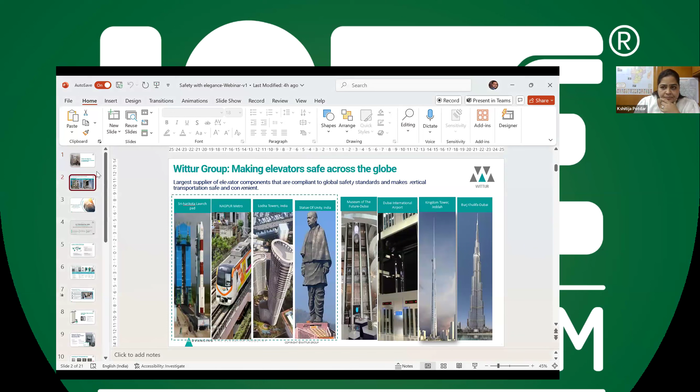We have picked up a topic with respect to safety with elegance, focusing on the glass doors, but we will come into the flow to help you understand why we have chosen this subject and where the relevance fundamentally comes in for Wittur, I am sure.

In the classic quintessential Bollywood style, naam to suna hoga. Wittur is something which has been in the industry for almost 1.5 decades now in India, and almost around 6 decades in terms of its operations overall.

We are the world's largest manufacturer of elevator components that are powering elevators across different applications, right from a residential segment to a very high critical infrastructure project, like the ISRO space launch center, the Sriharikota launch pad, metros, Sardar Vallabhbhai Patel Statue of Unity, world's tallest statue today, residential landmarks, or engineering marvels like the Burj Khalifa, Kingdom Tower of Jeddah, Dubai International Airport, and as much as you would typically think of.

Wittur products today are part of every third elevator in the world, and that's the kind of equity we have built over the years when it comes to our ability to serve you with the best solutions and products which make the elevator safe and productive.

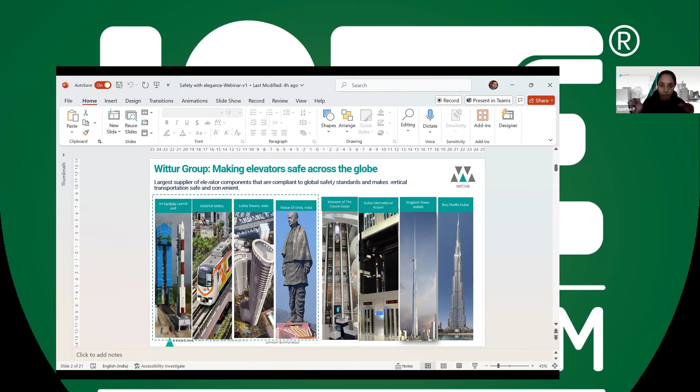So I was talking about the relevance of India in the elevator industry today and how it is one of the fastest growing infrastructure markets globally, with respect to real estate being pegged to be about 3 trillion US dollars by 2030. India is vertically growing up.

We can see it all around when we look beyond the metro cities, into our tier 2, tier 3 cities, and see how buildings are going taller. As such, elevators are also evolving, where to cater to a taller elevator, you have to focus on it being faster, much safer, compliant, and energy efficient.

These are some of the things which I'm sure is very topical, and each one of you who are part of this industry and joining me in this session would relate to.

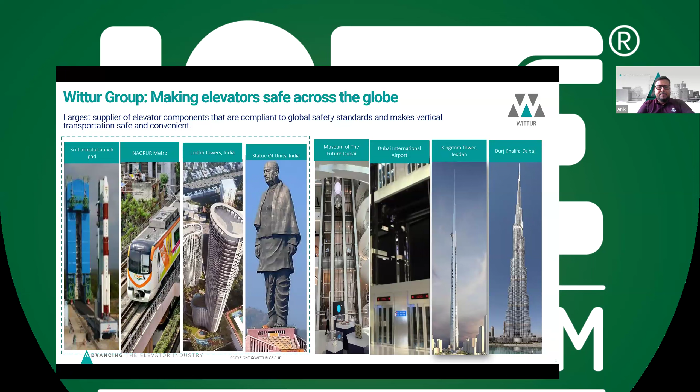That's why it's important for us to focus on what Wittur does today, to be aligned in that segment specifically. What we fundamentally believe is that what the elevator industry today is talking about as needs for the future, Wittur delivers today. One of the most topical aspects coming in is basically IS 17900.

All of you are familiar with the fact that on 21st of December 2025, IS 17900 is coming into effect, and the older IS 14665 is going defunct, resulting in a lot of new stricter norms becoming applicable specifically with respect to elevators.

There are multiple components across the elevators, like the doors, the door locks, the safety components, the control with respect to avoiding unintended motion, etc. Multiple aspects have been brought in, making the elevator expectations much more stringent in terms of compliance and performance.

Why I put this claim out in terms of what Wittur has been doing over the years is that what the industry needs tomorrow, Wittur does today in terms of what we bring to your solutions.

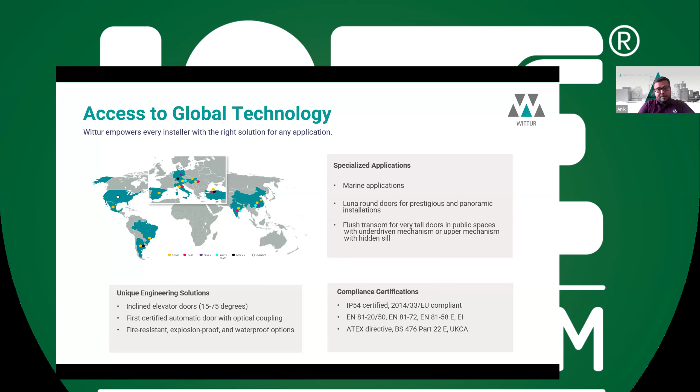Now that is particularly what makes Wittur a very strong partner for our customers, enabling them to solve the requirements of their end customers as per design, as per architectural requirement, and as per compliance and safety norms.

Moving forward, the India portfolio, I'm sure you guys are familiar with. In India, we manufacture the doors, both landing and car doors. We manufacture cabins, slings and car frames, which are compliant to 17900. We have progressive safety, we have overspeed governor, and of course we manufacture a full home elevator traction offering in India, which is very unique for the fact that we are offering a solution compliant to the IS 15259 standard as per the Indian requirement of home lift code.

Interesting for all of you to know that in the safety space, as I said, we are already building it as a center of excellence for Wittur Global. We already are exporting progressive safety gear and overspeed governors, up to the speed of 2 meters per second, made in India and exported to global Wittur supplies across Europe, into China, as well as in the Americas.

So Wittur has already built up the Wittur India plant capability to offer products which are CE certified, compliant to global standards, and are being fulfilled from India to be truly Make in India in terms of our ability there.

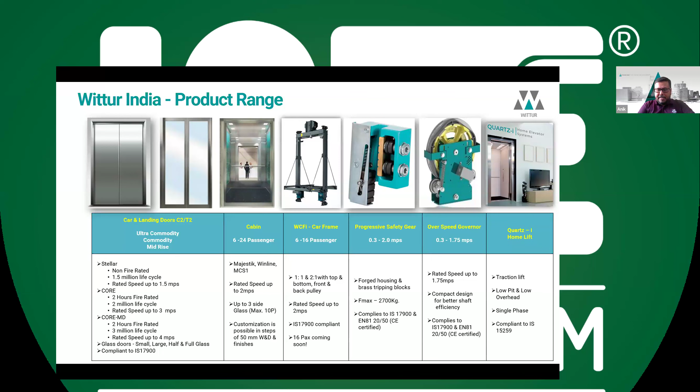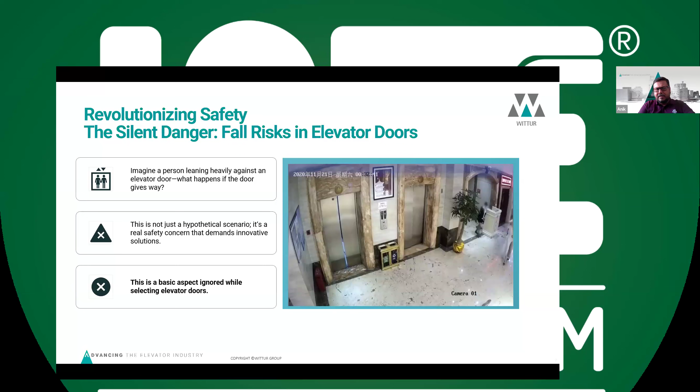Quickly moving forward, we talked about the aspect of simple stuff, feature sets, safety aspects, which fundamentally make the elevator doors safe. And this is one such feature which is perhaps a very basic requirement that today mostly gets ignored when an elevator is being designed, an elevator is being put up, even in a commercial or residential environment.

Fall protection - this is basically, you see a video that is getting played on the screen. It's a grab from an incident that happened in China where people fell into the shaft because the door panel gave way with respect to the weight of the two people who you saw leaning on the door. Though they were drunk, they shouldn't have been.

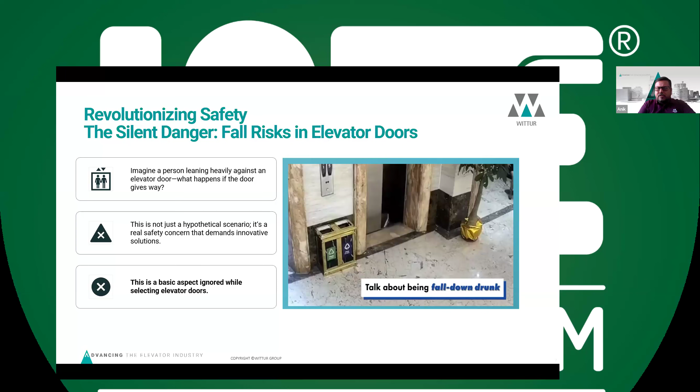But the fact is, at the end of the day, they fell into the shaft. Such incidents have happened in India as well. It always pains us to show such videos because they typically involve human injury. But unfortunately, these are so important for us to understand.

What makes this important is a simple aspect: elevator doors need to be safe and fall protection needs to be in place. Imagine a residential apartment complex, many of us are living in those buildings today. On the third, fourth, fifth, eighth, or tenth floor, small kids are playing in that lift lobby with their cycles, and many of them have a tendency to go and hit the door with the cycle. Dashing is something very common among kids, something they have fun with.

I'm a father, I know how my son used to be at this age when he used to run around. Dashing is something which is a fun part for them. Imagine an accident that can happen when the lift door gives way, and the risk of somebody falling into the shaft is so high.

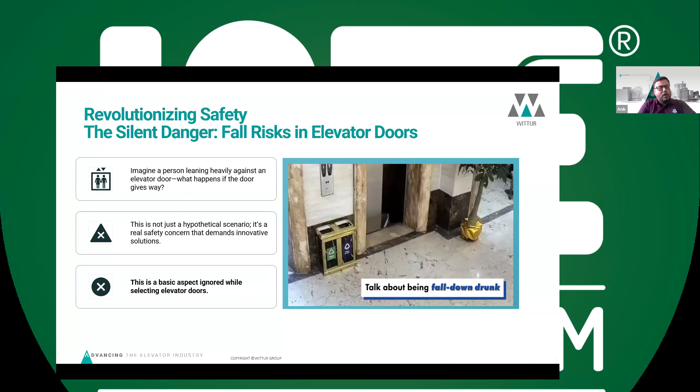This is something that goes into the design, and what Wittur has done, Wittur has been doing this for a long time. We got an opportunity to talk about it today, and that's why it is extremely important for us: there is a patented solution that Wittur has built, which fundamentally allows the panel to get locked with the sill. This is extremely important from the part of an endurance test as required by IS 17900, or the equivalent EN 81-20/50.

A patented sill hook design. This is a patented design of Wittur which allows the panel to get locked with the sill, resulting in the fact that it prevents the accident you saw, to a great extent, because the panel is locked with the sill and it doesn't come out. It doesn't come out in case of somebody hitting it, it doesn't come out in case of an earthquake or a fire incident. It also prevents the whole panel from falling inside the cabin onto the passengers in case of any emergency.

This is extremely important. A very small feature, but it adds value to an elevator door when it comes to 100% fall protection. We are very proud to tell you that all Wittur doors are designed for fall protection, from our basic door in the commodity segment to the infrastructure door we manufacture in the heavy duty space. All of them come with this fall protection feature.

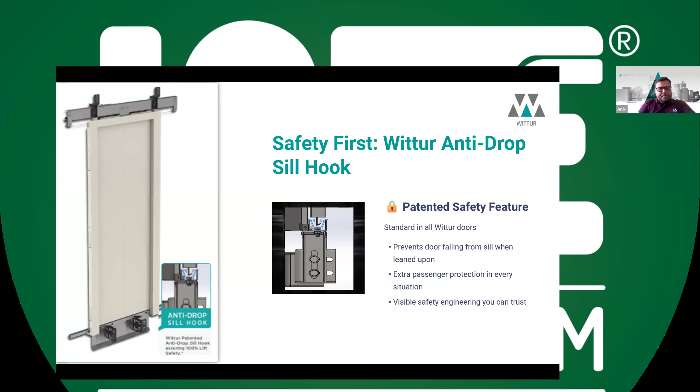Moving ahead, this is something very interesting. I'm very proud to talk about this as an achievement being made into reality by the R&D team in India.

This is a decade-old challenge that elevators in the metro and airport segments were facing, where in scenarios where the elevator door is exposed to direct sunlight, in many cases the elevator doors were developing expansion of the steel leading to bowing. Direct sunlight heats up the surface of the elevator door, and typically a 4 to 6 mm kind of bowing was appearing on the doors, fundamentally causing it to rub against the frame during operation, or in some cases even stop the operation.

This has been a problem for almost a decade without a solution. Lifts in metros or airports, which are typically exposed to almost around 70% sunlight, fundamentally had the challenge of this bowing coming in.

In the last 6 months, Wittur has fundamentally resolved this problem by coming up with a very unique patented panel design, which makes science as a part of the design itself. Thermodynamic expansion of steel given higher temperature is a natural phenomenon and it cannot be avoided.

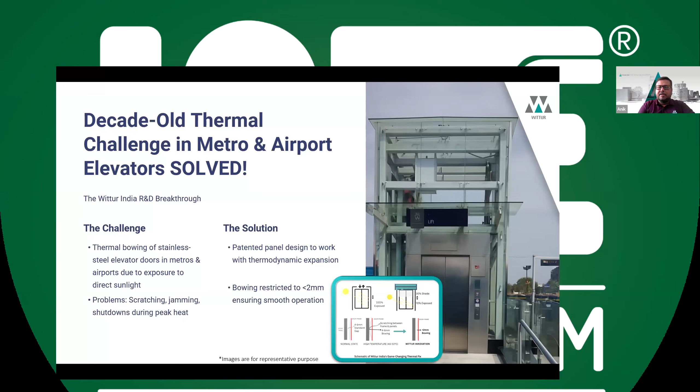This is a significant achievement that Wittur's India R&D team developed, and we have already implemented this in multiple metro projects, including the latest being Surat Metro, which is in one of the hottest parts of India from a perspective of installation. We are very particularly proud, and I feel really, really proud to represent the team at the back end. Velan has been part of this team, the R&D team in our plant, who have rigorously worked on this and solved this problem, which had been bothering the industry for almost around a decade.

Moving forward, 17900 is the flavor. We spoke about this, and 17900 is getting applicable from December 2025. Wittur already has products, as I said, our glass door portfolio, which are 17900 compliant. We have the entire range of glass doors ranging from small vision, large vision, half glass, and full glass, which would typically be 17900 compliant.

There are already a few new products getting added effective November, where fundamentally you now have a 17900 compliant glass door available to you for all your installations. One of the most important aspects of 17900 from a glass door perspective comes in from this aspect where it demands passing a pendulum test of 1000 Newton.

People who are familiar with the codes, IS 14665 also had the requirement from an endurance perspective, but the requirement there was 345 Newton, which is roughly around 35 kgs if you do a conversion. But now imagine this being 3 times with respect to what 17900 is expecting the doors to be durable, and there is a deflection test that needs to be passed.

So every glass door fundamentally passes through this, and this is one particular video that I wanted to show you of a pendulum test being done in Wittur R&D lab in India, which fundamentally tells you why we are what we are, and the most important aspect of the 17900 being passed.

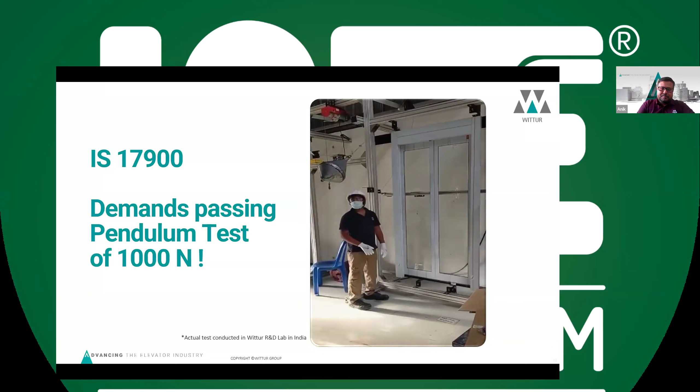So what you just saw is basically a 1000 Newton pendulum hitting the middle of the glass, and the door stays. One of the most important aspects that you guys should also know, and we are very, very proud of the fact that the pendulum test of 1000 Newton has been passed with our patented design of the glass, where we have used a 4+4 laminated glass that we use in our regular core door portfolio that you would have been using so far.

Which means that for a 1000 Newton pass test of 17900 compliant door, since we have been able to achieve that with our existing design, there is no additional cost that is getting passed on to our customers.

We know for sure that other players in the market today who offer a 17900 compliant glass door had to change the thickness of their glasses to around 6+4, minimum 10mm, resulting in the door becoming heavy, the mechanism having to change, and hence an overall cost impact which has been passed on to customers. At Wittur, our innovation and design thinking is such that we can achieve this with our existing design at zero additional cost, and that's what we are bringing to you from a perspective of an IS 17900 compliant glass door portfolio, at the same cost we have been offering you.

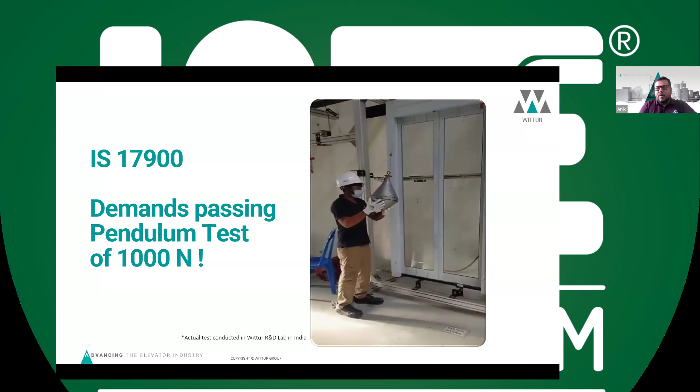But now you have got a better product, a more rugged and endurant product, which fundamentally passes the 17900 requirement. Moving forward, something we are also very proud to launch: our glass door, or Elegant series of glass door portfolio, now also has a 2-hour fire rated variant. We launched this just this month in September, where we have opened up order booking for our customers. Fundamentally, a small vision, a large vision, a half glass and a full glass would be available with 2 hours fire rating.

First time in India, first time we are making these doors in India, completely available to you compliant with 17900, IS 17518 Part 2, EN 81-20/50, EN 81-58, E120, available in a range of around 700 to 1400 opening and 2000 to 2400 opening. Multiple special finishes possible, tinted glass options possible, with a minimum vision size starting from 155 width and 200 height, for a complete door range series.

This would be available in our core MD, core mid duty, and the Hydra series of doors coming out to you from India. So we are extremely happy to announce this and let you know about Wittur offering products which are not only compliant, but also in line with the latest requirements.

And I spoke about the fact that India is growing vertically. As we grow up, the mid-rise and high-rise segments are the ones growing faster. You typically need compliant doors, not just for passenger lifts, but maybe for service lifts, fire evacuation lifts, and specifically in markets like Western India, for example Mumbai, Maharashtra, who have typically been asking for these things. Now these doors are available to you from the Wittur India plant, easily available for you to pick up for your projects.

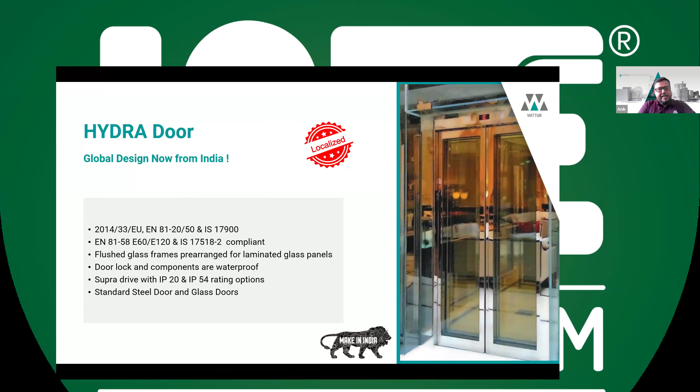Quickly moving forward, this is something which, needless to say, is one of the most important aspects when it comes to the importance of elevator door safety. Elevator door is perhaps the first and last point of contact, other than the call buttons for example, in an elevator, that any passenger gets involved with when talking about the elevator.

I am sure you would have seen multiple creative videos of life happening in an elevator, people falling in love in an elevator, to certain extent videos where people don't even talk to each other in an elevator, right? They just come in, look at the mirror, spend time. All of those things are there, but the elevator door is the most important aspect. That's the first and most critical safety element visible to customers from an elevator safety perspective.

A lot of data is available. We have put up a quick snippet, though it is a little dated, but if you talk to consultants in the industry, they will say the numbers have gone up significantly, where issues or injuries have happened with respect to a wrong door installation, or an unsafe door being put up in elevators. So this is extremely important, and this is what Wittur is trying to do. You saw me talking about fall protection being brought into the door design, resulting in the fact that we, as a manufacturer of the door, are trying everything to bring these safety components and safety aspects into the product as much as possible.

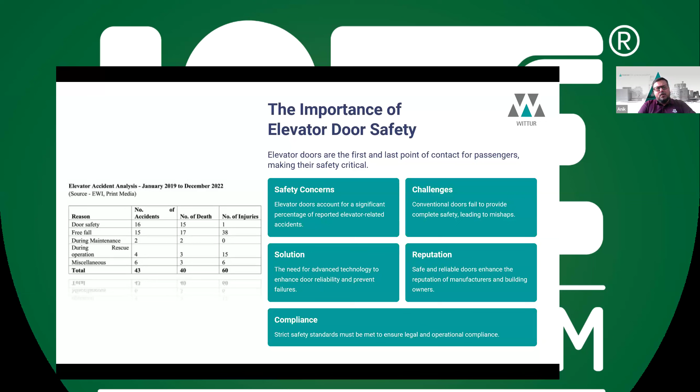So with that thought, I will quickly move on to the next one, why compliance is important. There are multiple experts in the industry today who have been shouting their lungs out to talk about compliance, and this is something I believe. In the last two years that I've been associated with this industry, associated with Wittur, I see a lot of transition happening. I see a lot of intelligent conversations happening at the end user level, at the installer level, where they are becoming more and more conscious about compliance and why it is extremely important to be compliant.

With IS 17900 kicking in December, I believe that will also get a lot of impetus. And as we move into 2026, the whole aspect of peace of mind when it comes to an elevator is something that will be drilled down. The end user would understand, the builders would understand, our installers who are providing the service would understand, and manufacturers like Wittur, who are trying to bring these innovations already in place, offer something compliant, with certified components to meet all the requirements coming in from your end users, is something that will continue to drive growth in that part.

Last, Wittur doors. We are known for our doors, and we are focusing on our elevator doors, be it a stainless steel door or a glass door in multiple vision sizes - that's fundamentally what Wittur brings in. Wittur is perhaps one of those manufacturers globally who also gives you an endurance certificate for the tests we do. Our doors are minimum 2 million life cycle tested, which means one open and close is considered one operation. So 2 million times, that is 20 lakh times, the door is being tested in our laboratories.

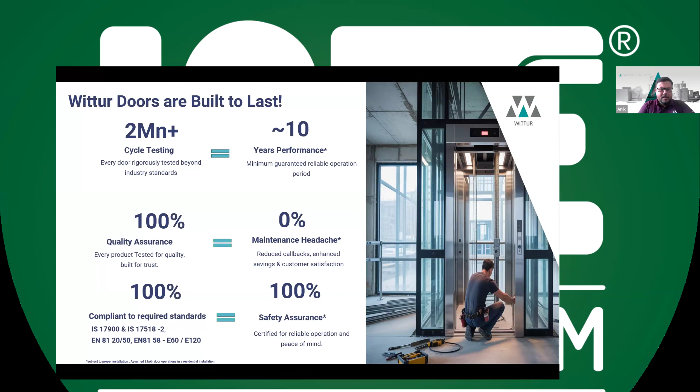A few important launches and announcements. I'll take this opportunity, since I have an audience, to talk to all of you. We have our Stellar standard doors, which is a non-fire rated commodity door. The standard door of Stellar will be 17900 compliant, with the patented anti-drop fall protection built into it. The anti-drop fall protection is already there, but now it will be 17900 compliant.

Starting our supplies from December, you have this coming in, where our commitment to offer you doors which are compliant is something we are meeting. Product launch announcement on the safeties.

We have the overspeed governor already available in the market today, the OL20. As I was saying, this is one product that we sell into Europe, China, Latin America and North America for Wittur itself. We are launching, localizing the OL35, which is a global product for up to 3 meters per second, in India, coming in by Q1 of next year.

The progressive safeties: 17900 mandates that any elevator greater than 0.63 meter per second speed would now have to mandatorily have progressive safeties. So far, instantaneous safety was used up to 1 meter per second, but now it is going to change. We already have the CSGB01, a product made in India for global, which is up to 2 meters per second.